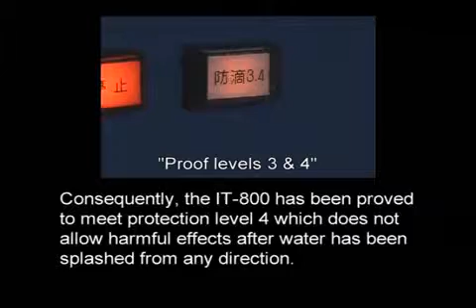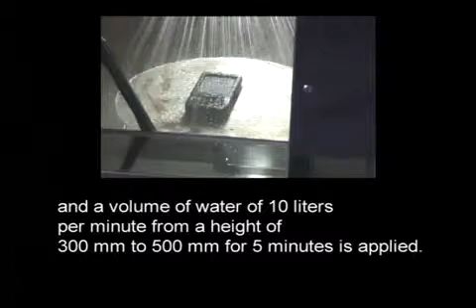The IT 800, with the power turned on, is placed on a turntable within the water splash test equipment, and a volume of water of 10 liters per minute from a height of 300 millimeters to 500 millimeters for 5 minutes is applied. During this period, the precipitation pressure is set to 50 to 150 kilopascals.

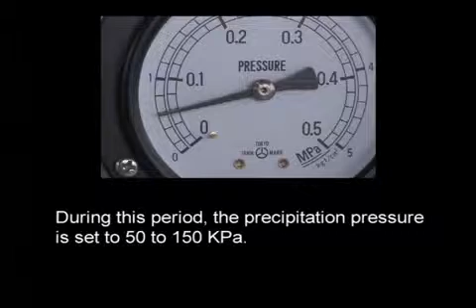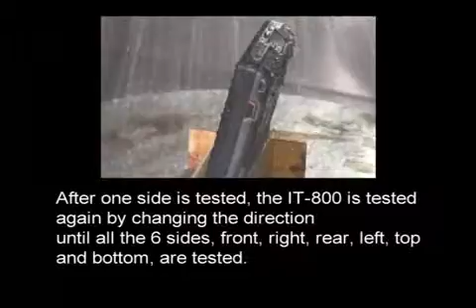After one side is tested, the IT 800 is tested again by changing the direction until all the 6 sides, front, right, rear, left, top, and bottom, are tested. At the end of each test, an operation check is performed on the IT 800.

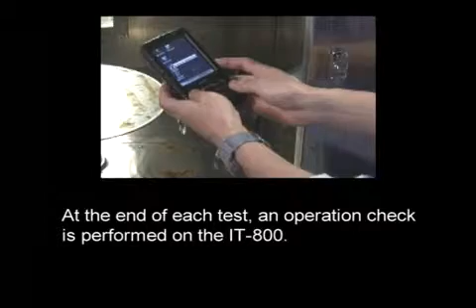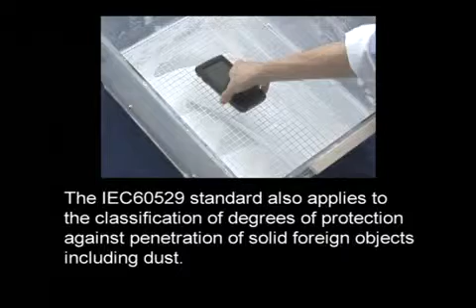Dust Proof Test. The IEC 60529 standard also applies to the classification of degrees of protection against penetration of solid foreign objects, including dust. The classification of degrees ranges from 0, non-protected, to 6, dust-tight, the highest possible rating.

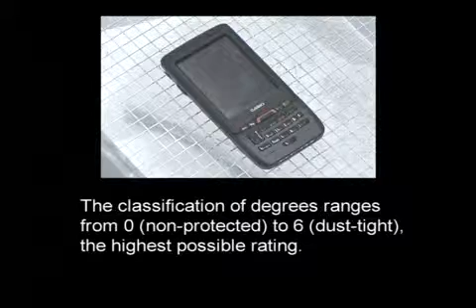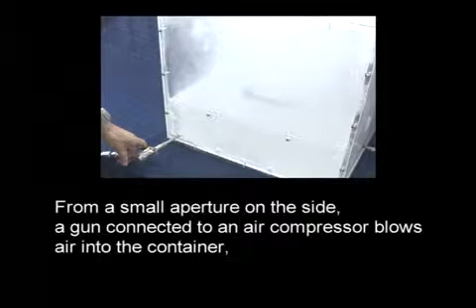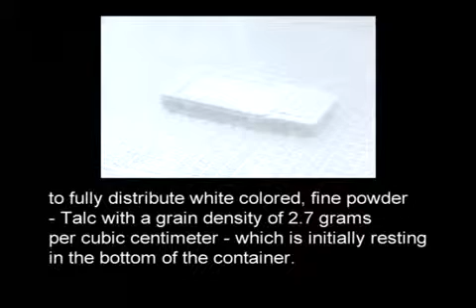The IT 800 is firstly placed in the center of an airtight container. From a small aperture on the side, a gun connected to an air compressor blows air into the container to fully distribute white-colored, fine powder, talc with a grain density of 2.7 grams per cubic centimeter, which is initially resting in the bottom of the container. Once this operation is complete, the container is tightly closed.

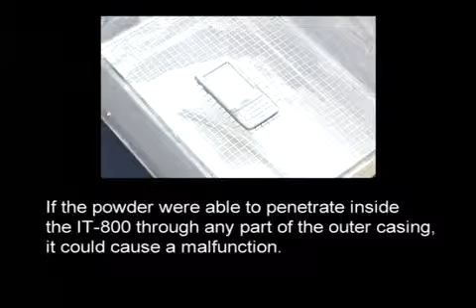It takes nearly 1 hour for the powder to settle on the bottom of the container and over the IT 800. If the powder were able to penetrate inside the IT 800 through any part of the outer casing, it could cause a malfunction.

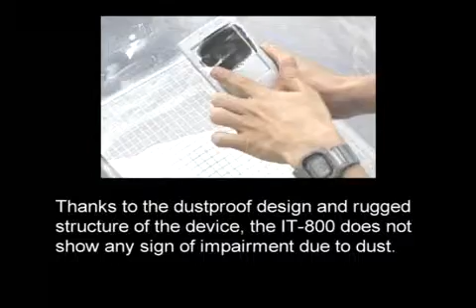Thanks to the dust-proof design and rugged structure of the device, the IT 800 does not show any sign of impairment due to dust. This proves that the IT 800 meets the criteria for protection against dust, dust protected, which equates to IP code 5.

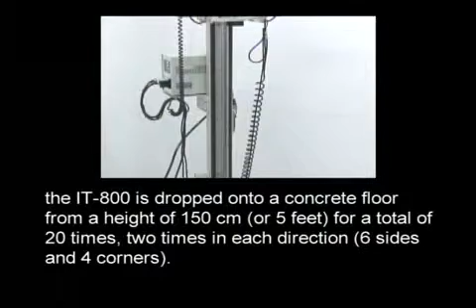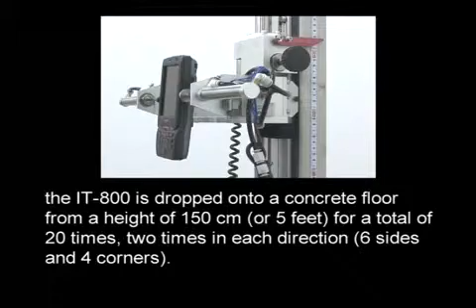Drop Durability Test. To ensure the drop and impact durability of the device against harsh handling in its service life, the IT800 is dropped onto a concrete floor from a height of 150 centimeters, or 5 feet, for a total of 20 times, 2 times in each direction, 6 sides and 4 corners.

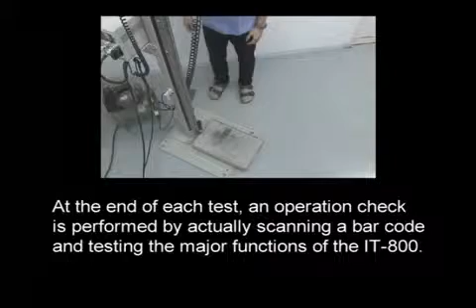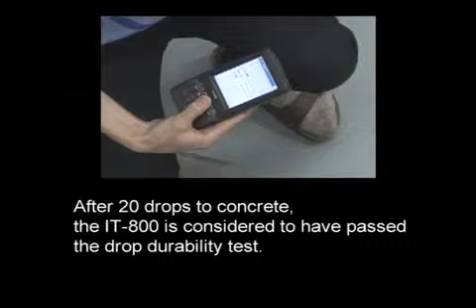At the end of each test, an operation check is performed by actually scanning a barcode and testing the major functions of the IT800. After 20 drops to concrete, the IT800 is considered to have passed the drop durability test.

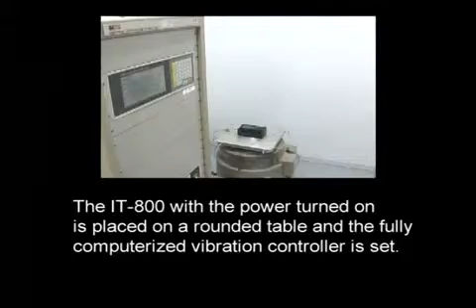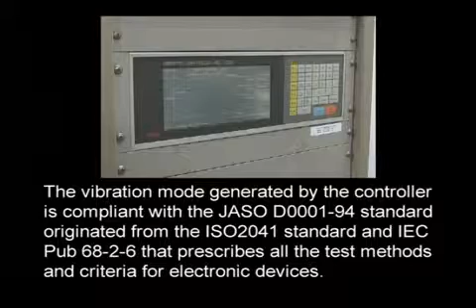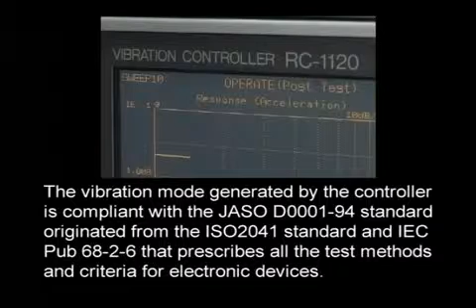Vibration test. The IT800 with the power turned on is placed on a rounded table and the fully computerized vibration controller is set. The vibration mode generated by the controller is compliant with the JASO D0001-94 standard, originated from the ISO 2041 standard and IEC publication 68-2-6 that prescribes all the test methods and criteria for electronic devices.

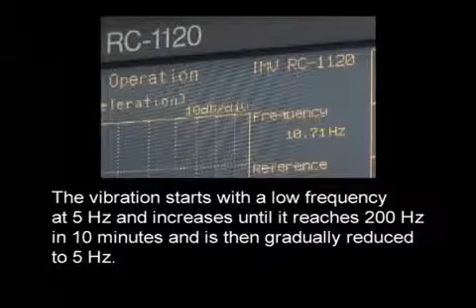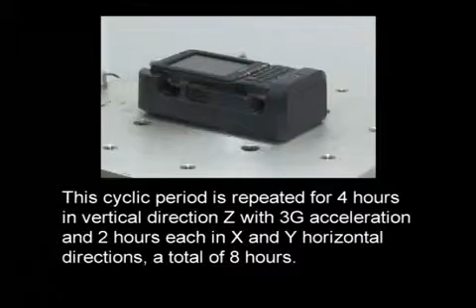The vibration starts with a low frequency at 5 Hz and increases until it reaches 200 Hz in 10 minutes and is then gradually reduced to 5 Hz. This cyclic period is repeated for 4 hours in vertical direction Z with 3G acceleration and 2 hours each in X and Y horizontal directions, a total of 8 hours.

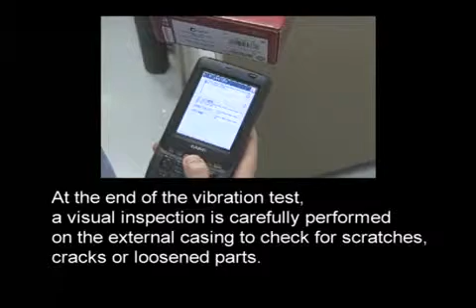At the end of the vibration test, a visual inspection is carefully performed on the external casing to check for scratches, cracks, or loosened parts. All major functions, including scanning barcodes, must be performed without any error.

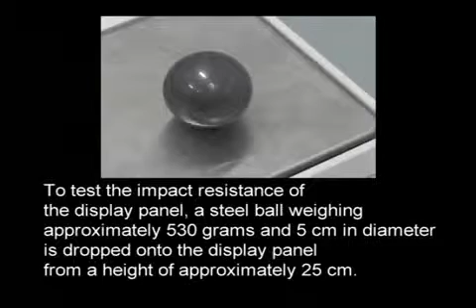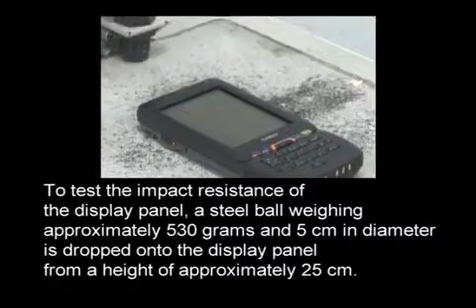Display panel impact test. To test the impact resistance of the display panel, a steel ball weighing approximately 530 grams and 5 centimeters in diameter is dropped onto the display panel from a height of approximately 25 centimeters. A special shock-absorbing material is incorporated between the touch panel and LCD to protect the panel from cracking.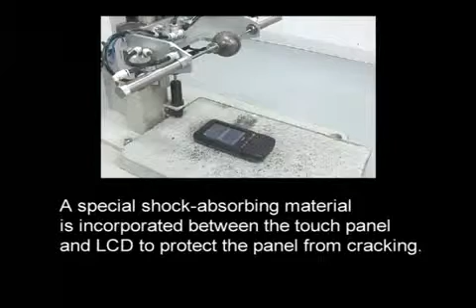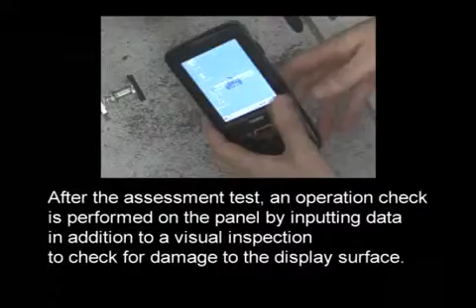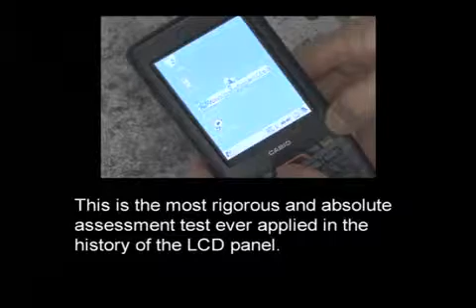After the assessment test, an operation check is performed on the panel by inputting data in addition to a visual inspection to check for damage to the display surface. This is the most rigorous and absolute assessment test ever applied in the history of the LCD panel. Powerful, flexible, rugged IT800 series.